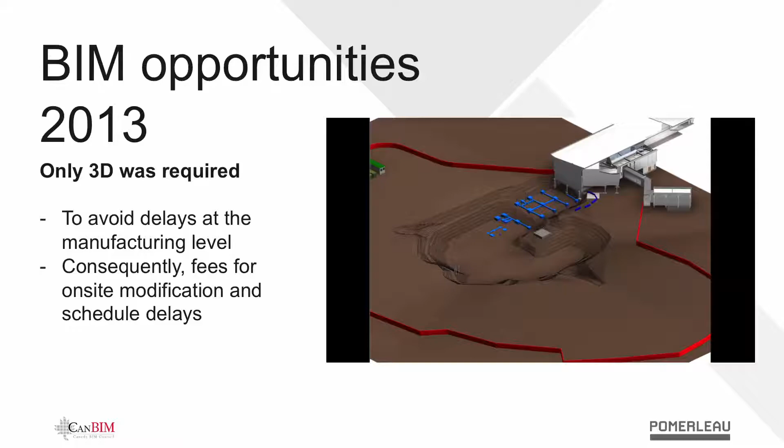But Mr. Pierre Saint-Onge and Pomerleau wanted to use the additional planning tool for planning and coordinating. The 3D model was going to be transferred to specialized contractors and the construction team so as to apply the concepts. And the idea was to do virtual construction. The obligation to design in Revit was added. Certain contractors needed some help, but they got a lot of cooperation and were able to improve in time.

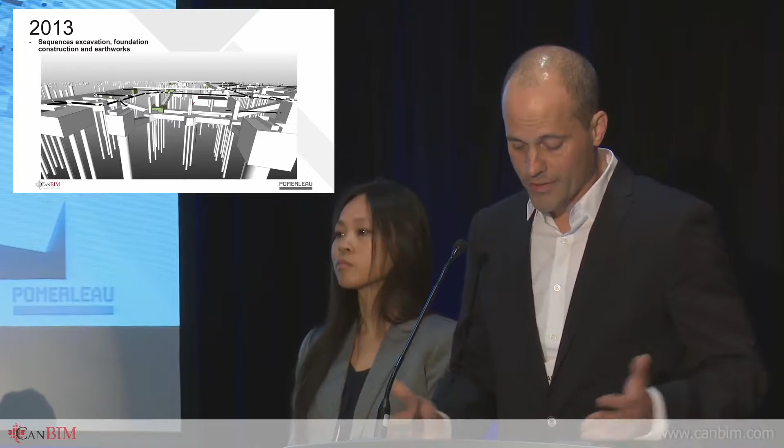Of course, if you have electromechanicals and technical rooms, we used the real dimensions of every piece of equipment. We had coordination sessions with specialized contractors with a visualization period in 3D. This made it possible to virtually look at the final product, but also to agree on how to order the work so that we could address the more complex sectors. As we use the model, we start to have a lot of ideas.

Our team didn't have much experience in BIM applications, but the 3D model turned out to be an ideal tool to resolve a lot of complex planning issues. And this was not limited to electromechanicals. It was also for other specialties less familiar with BIM.

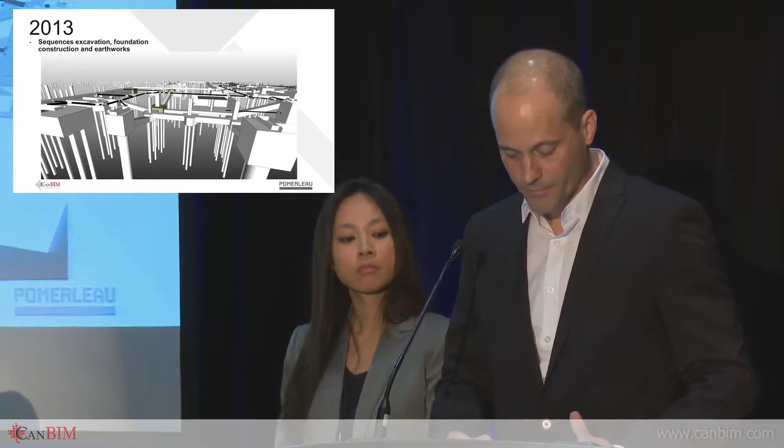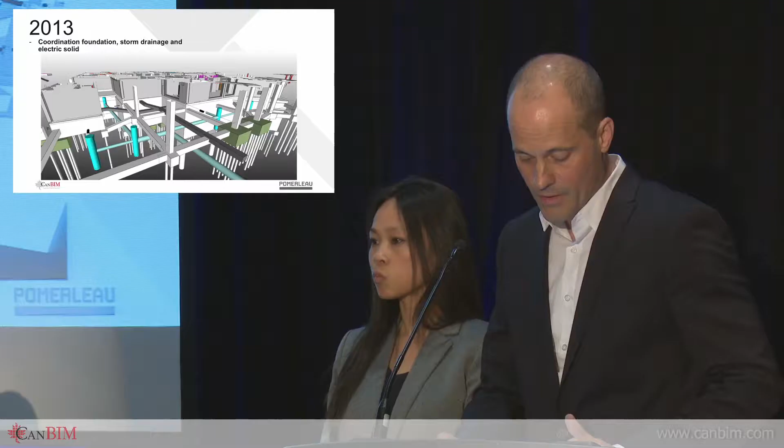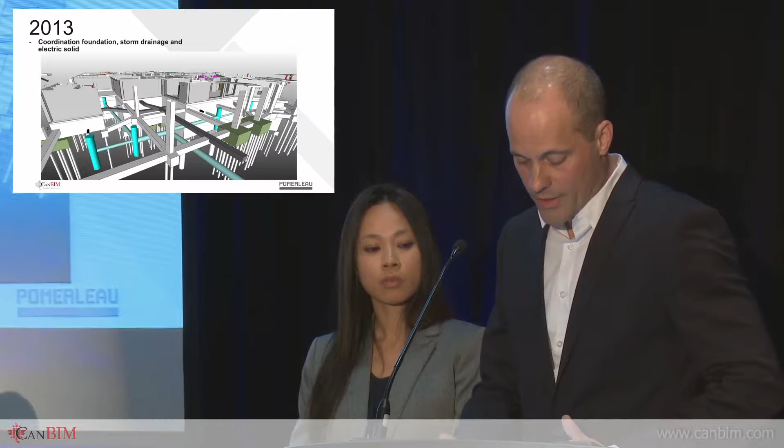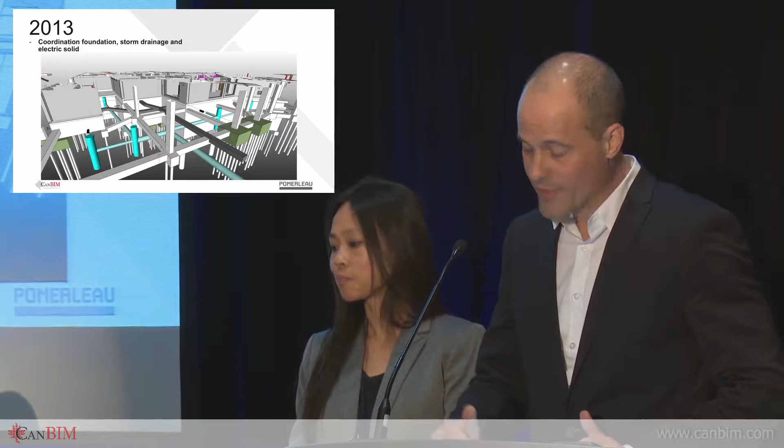The major complexity of the foundations of the building, designed over several levels, was really difficult for the various workers who had to do the formwork and the excavation, etc. But 3D visualization and 4D simulation was also able to help resolve a lot of differences of opinions and helped sequence the activity so that we didn't have downtime. Contractors were unanimous: use of the model was largely a cause of the successful completion of this critical part of the work, in a timely fashion.

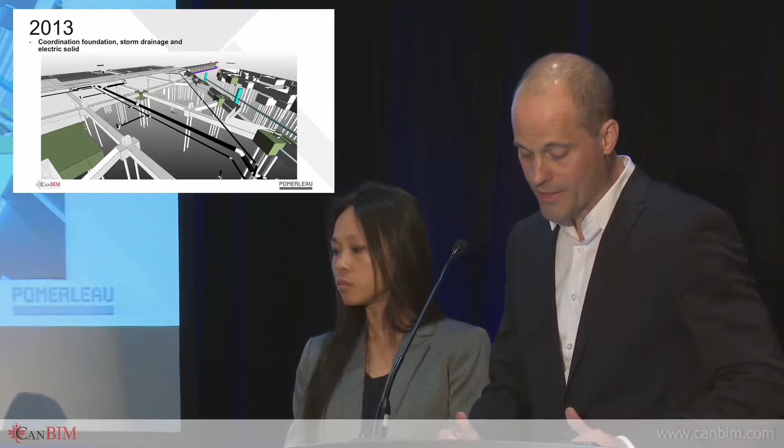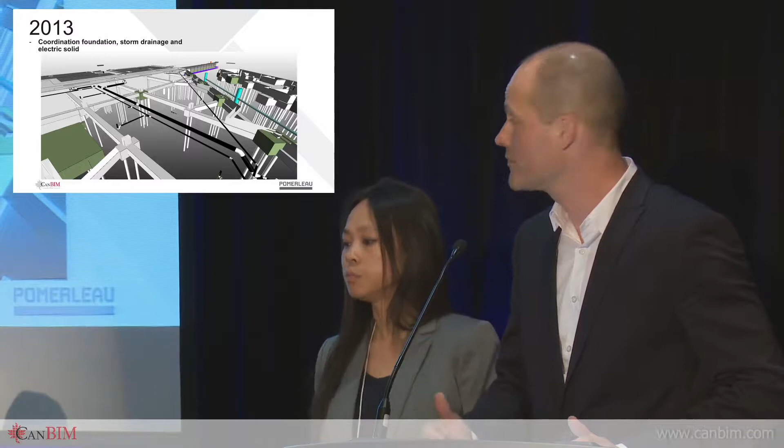But other people had equipment installed in landfill. We had electrical, drainage facilities, and there was a lot of conflict amongst the structure and the equipment. So we had to have value-added and optimization sessions. We had 3D to help engineering make the necessary changes in time. The costs of these modifications were minimal, and the scheduling was not affected. Don't forget, work had already been started and was moving ahead very quickly when we discovered these problems.

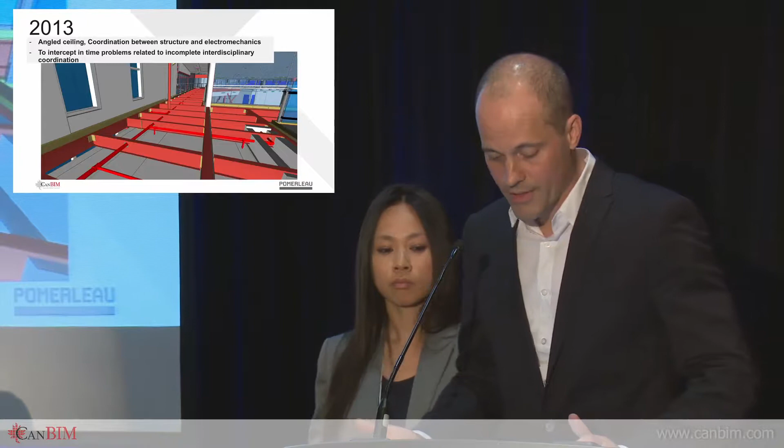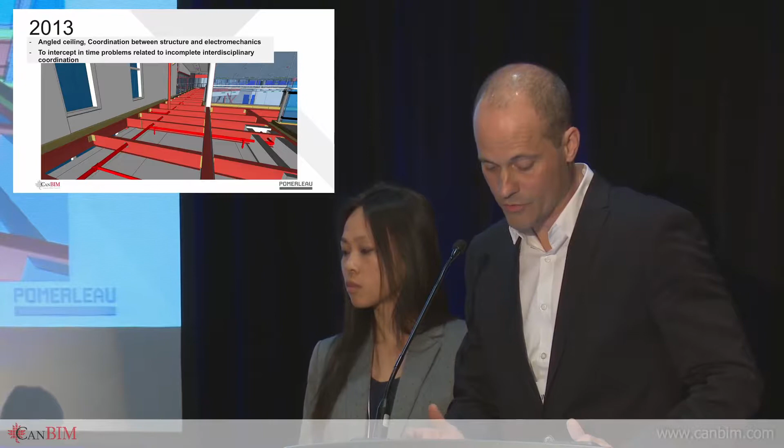Here you see an idea of the various conflicts that there could have been. We have all kinds of problems with the drainage and where the electrical equipment is going to go, etc. Then we had a lot of fire protection components that had to be integrated into the steel structure to offset the lack of space. This was done with the cooperation of specialized contractors and consultants. Coordinating from the model made it possible to confirm what was needed to be done and where, but we also avoided having a lot of ductwork go through the structures, thus avoiding a lot of problems.

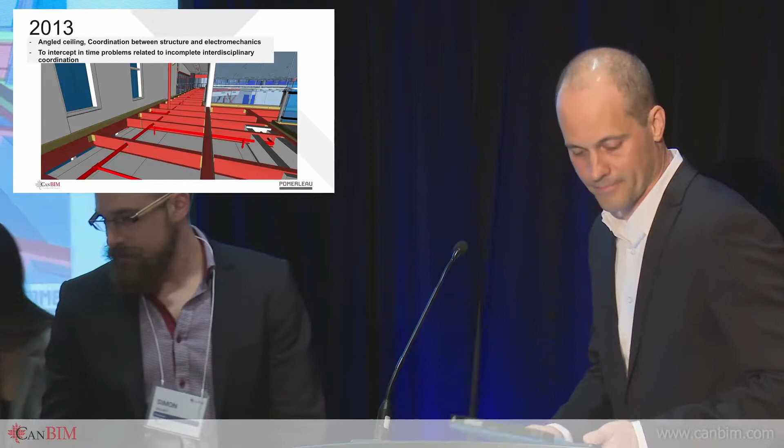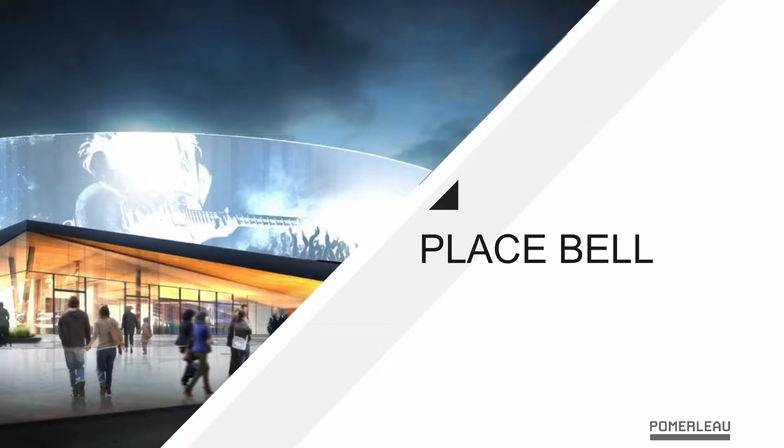I'd like to tell you about the Place Bell project. I worked with Sylvain on the extension of the International Jetty project, but as he mentioned to you, we started in the process with BIM when design was almost complete. So we started fairly late in the process, and we decided from that experience that we would change that with future projects. So in 2014, we decided to integrate BIM right from the start of the project.

So as soon as we started having the calls for tender, in the preliminary phases, we would get client documents, PFTs, information. We prepared the whole project using BIM right from the beginning, and that's a trend that's continued since then. We did win that project, and we continue to use BIM throughout the project. So I'd like to give you a few illustrations where we were able to be innovative with the Place Bell project.

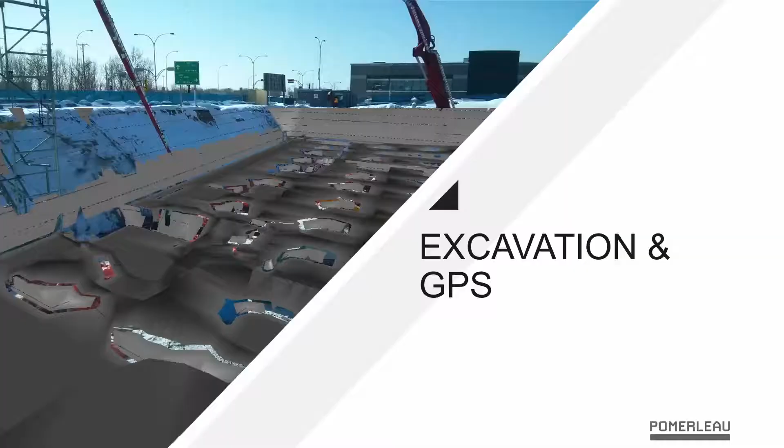So let's start with excavation. Right from the beginning of the project, in other words 2014, this was a design-build project. So we were starting design, but at the same time we were doing excavation. There was a large and changing quantity of information about the foundations, so we decided to use BIM to do a daily tracking. Really, this was daily to see what was happening in terms of foundations. So we were able to catch 100% of the changes, and there were changes every single day.

So here you see excavation and GPS. Why GPS? Well, because as you can see, we created a 3D model of the excavation, and then we transferred it into computers which were used by the excavators, so they could see exactly what they were digging in. They could see where the excavation limits were. We really optimized the process, even at the excavation level. This is the work that was done, and in addition we could optimize the location of the building on the land and all of the methods used in the future for excavation. So we saved a lot of money, and we were also able to respect our schedule.

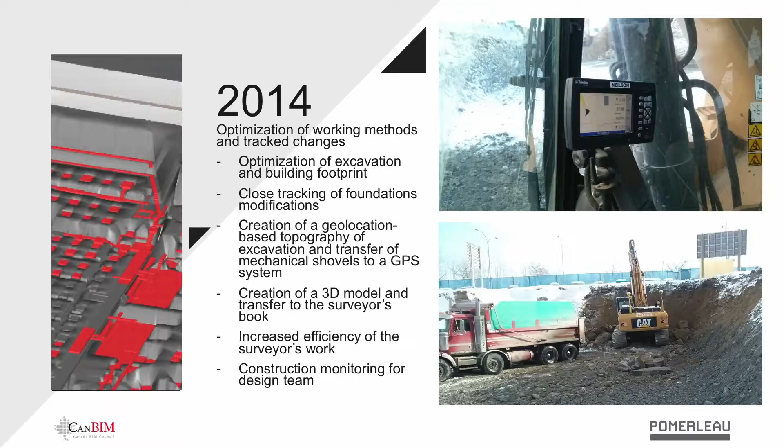Here you see some images of the excavation. On the upper right, you see what the people had in their excavators. They had GPSs, and you can see their computers. On the left, you see the actual excavation model, which is totally virtual, and it shows the foundations.

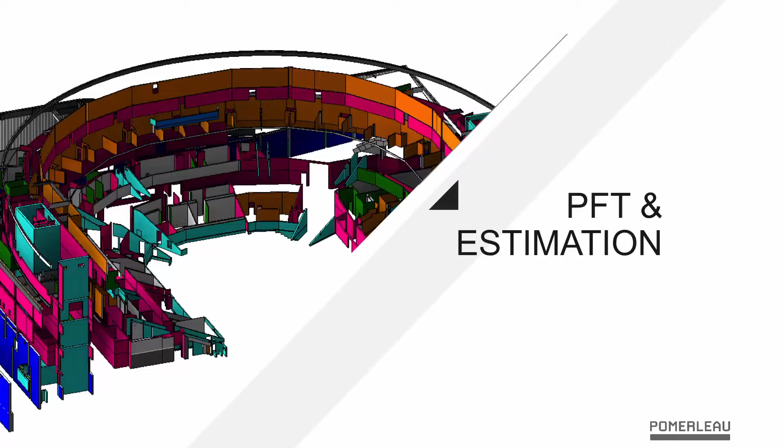PFT and estimates. As I said, right from the beginning we integrated BIM right from the very beginning of the call for tenders. So we wanted to manage our client's technical and functional program. So we knew what square footage we were looking at, what parts we were looking for. We integrated it all into the BIM model and we managed it very, very tightly. Every week we revised it, and we could see the colors, so we could really track in a simple but highly efficient manner. We were able to see everything that was changing and happening in the design stage.

We used it for the tendering process, but also during design. So we could do the follow-up with our professionals of parts, of square footage, and the clients got the same reports that we did, and we could exchange information. We could talk about whether this respected their requirements or where we needed to make corrections. So here you see a few examples.

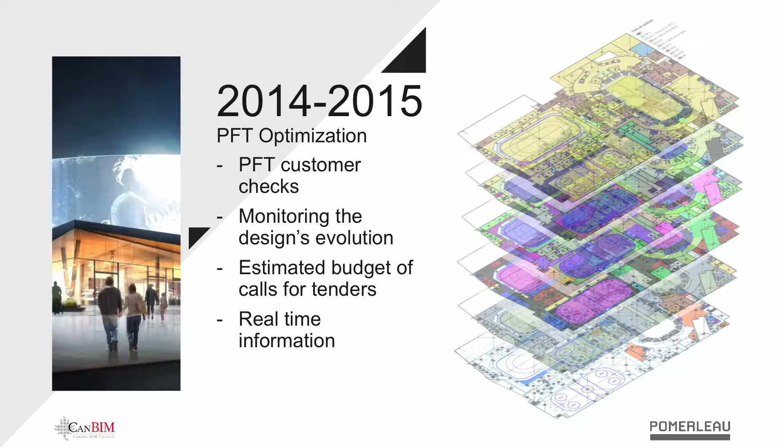The information is different, so there are 2D plans, but with information that was implemented in a 3D model. You can track this every day and every week, depending on how the design is moving.

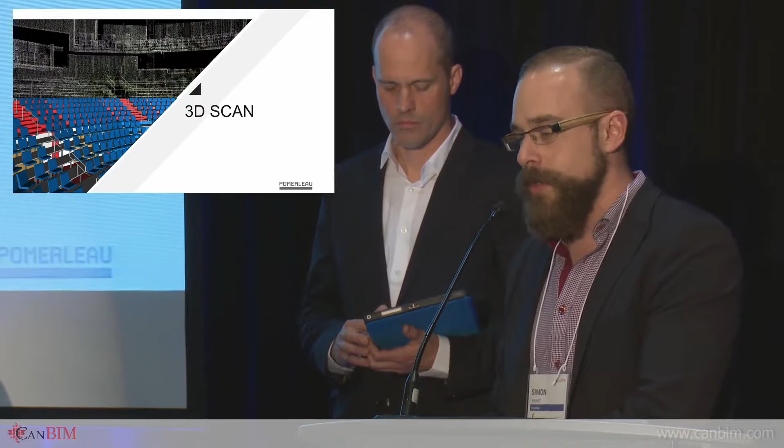There's a 3D scan. When we came in to look at the stands in the Place Bell Amphitheater, there was a Spanish company taking care of this, and a manufacturer somewhere else in the world. So we did the 3D scan to be sure that when they delivered their product, it was really going to be exactly what we needed and fit perfectly. We have a 3D scan, and there are even documents you could see showing what we had at the time. We wanted to be sure the quality of what was being built respected the manufacturing requirements.

Multidisciplinary coordination. A lot of people talked about this. Sylvain talked about it. It's something we began once we had the airport experience, and we integrated it into our process. I think Ivanka talked about it as well. It's not really an innovation anymore.

But what we did do with coordination was move it forward with our clients. I'll give you a quick example. We set out an audit process with our client, but it's virtual. We essentially covered 100% of the project over 3 different sessions, I think 3 full days. We sat down and basically audited every part of the building. They had their professionals team, we had our professionals and our contractors sometimes. We checked everything, looked at all the comments and measurements, and took note of everything. This way we were able to set up a list of items that had to be corrected.

That exercise was last year, so a year or a year and a half before delivery. We had a list of about 500 corrections we had to make. We called it the virtual building delivery, a virtual taking possession of the building. With the technical people and the marketing people, we got 100% of their comments, and they were able to check their whole building, all the requirements even above and beyond the functional and technical program our client had. We integrated them into our design and made all the necessary corrections they asked for. So multidisciplinary coordination, yes, but we try to push it even further, and we can use the tool for that.

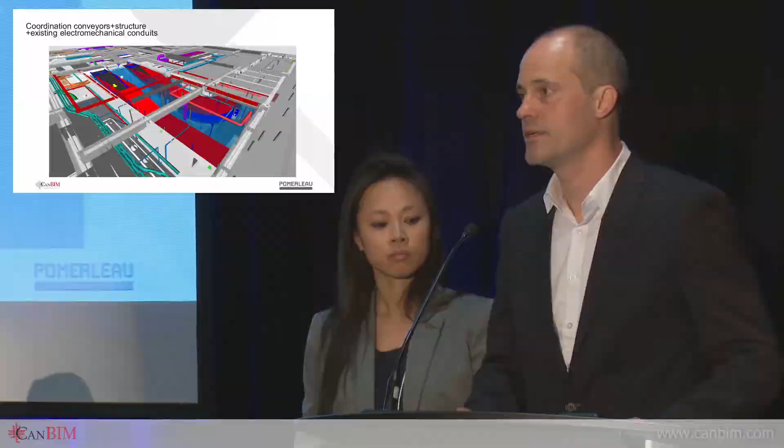Right from the beginning, the Montreal Airport said it wanted to have a 3D model, both for the design and the build of the actual project. So they encouraged us to use BIM. This was the first time, but we already had BIM expertise, which had improved a lot over 2 years. The number of specialized contractors using BIM increased considerably over those 2 years, so when we had a call for tenders, many more responded because it was a requirement of our tender.

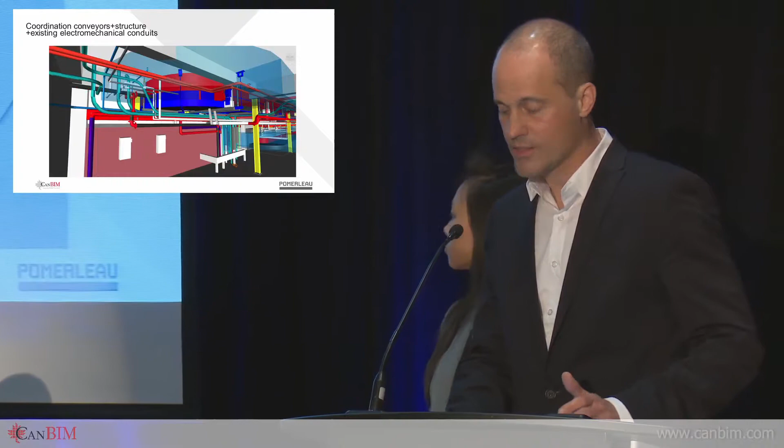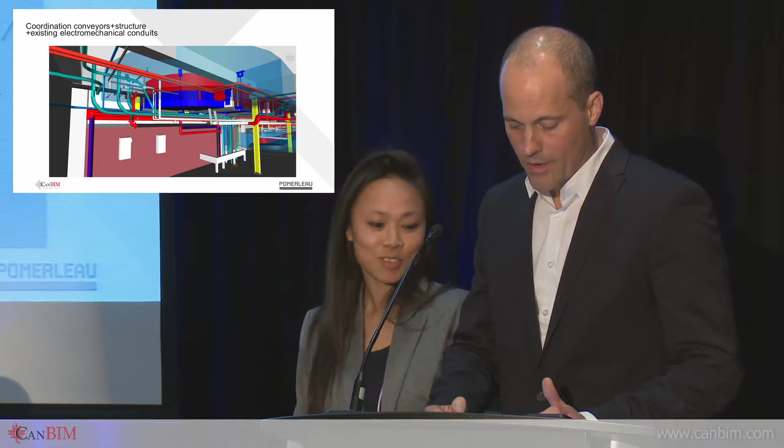Adding the baggage conveyors through old and complex structural elements and a lot of electromechanical facilities was, as you see modeled here, very complex. I'll explain: the idea was to deal with an existing structure, because there were 2 conveyors going down from level 2 to level 1, then turning around in an operational sector that is very narrow with a lot of existing ducts. So there was existing complexity, plus new highly specialized equipment, and it was an old structure that was pretty complicated as well.

The conveyors had to be ordered in advance because delivery time was long. They came from Europe.

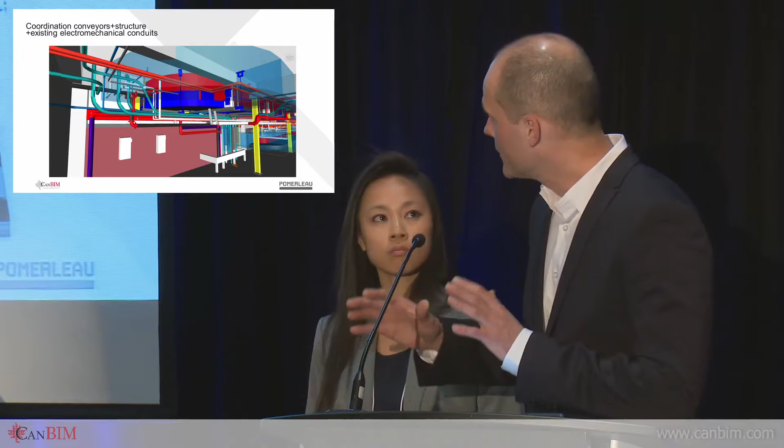So we modeled the clearances required around the conveyor belts for baggage, maintenance, and operations. And we created volumes. You could see in light blue, these are clearance areas for the conveyors for baggage, operations, and maintenance.

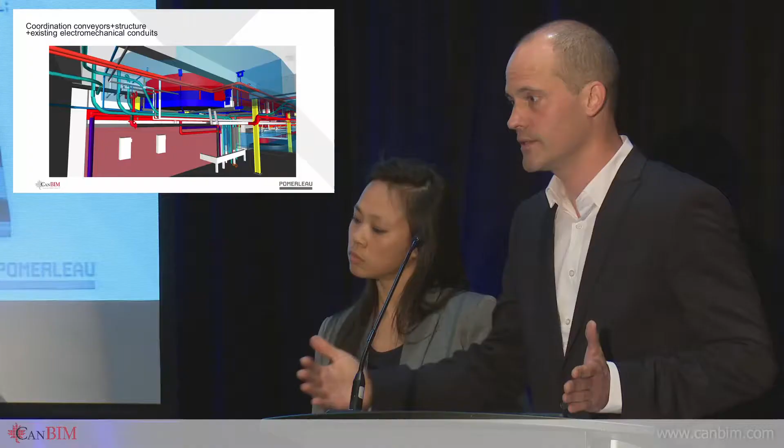We did this so that we could check to see whether there was going to be any potential interference after construction, because if there was, it would be problematic. We had to be sure that everyone knew how to build what needed to be built. And some of the new conveyors had to go above a public passage that had to remain operational. It was done as visualized - there was nothing unexpected and nothing that needed to be changed.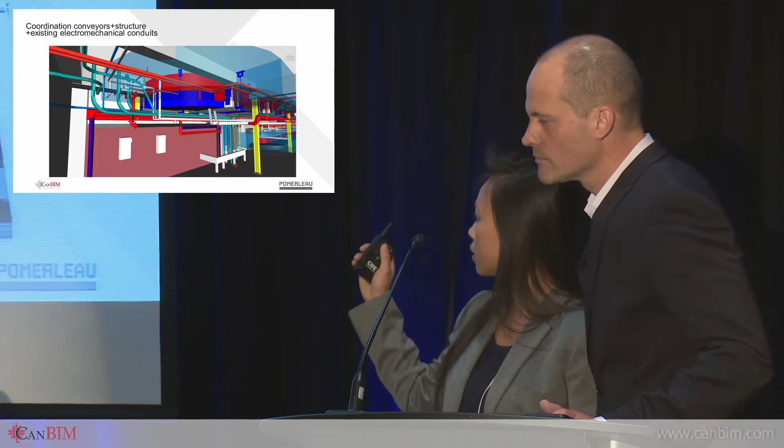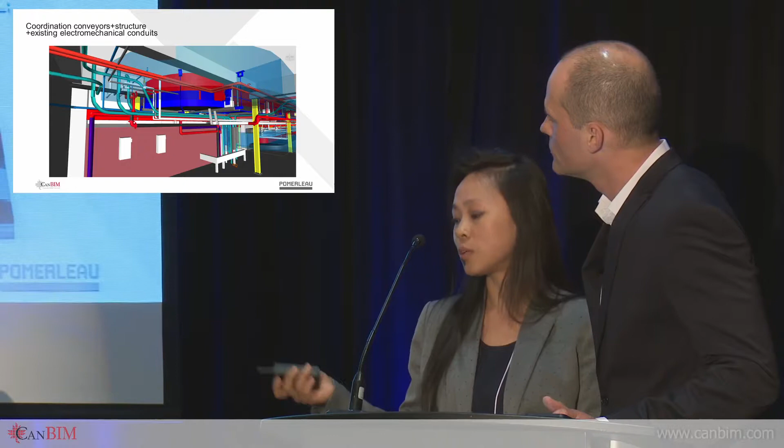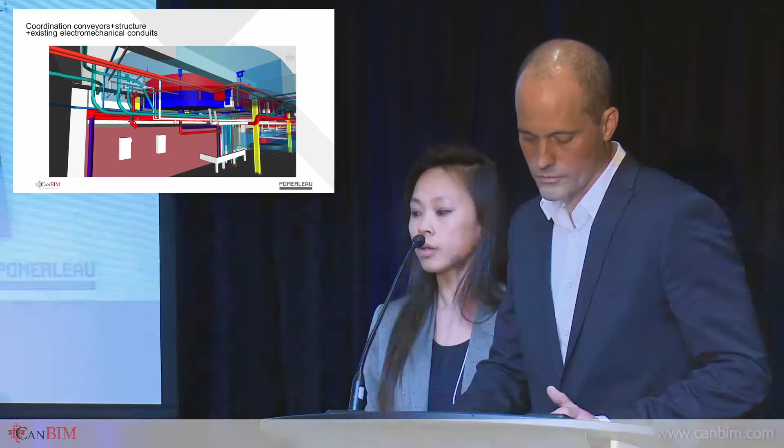Here you see on the right the public sector where people are picking up their luggage. And on the left, it's where the luggage carts are. And then you have the carousels. Closer to the ceiling, you see the conveyor belts, the new ones.

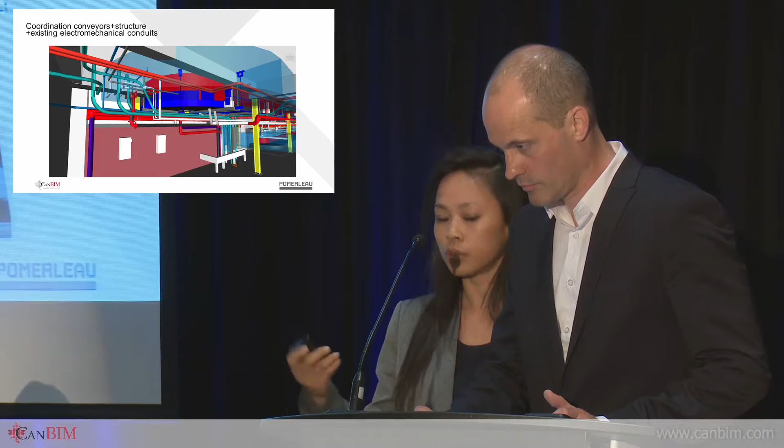In the project, there were several related projects, and they were all happening around the Zone 1 area, the major baggage conveyor room. They were very close to our project, so we had to ensure coordination with them.

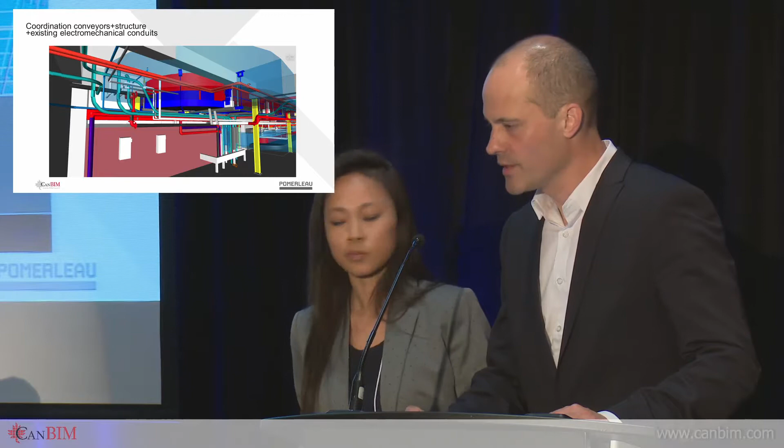So all of this work had to be done while the airport was running, and they had to be as invisible as possible. A lot of the work had to be done on platforms that were erected above where passengers were actually walking.

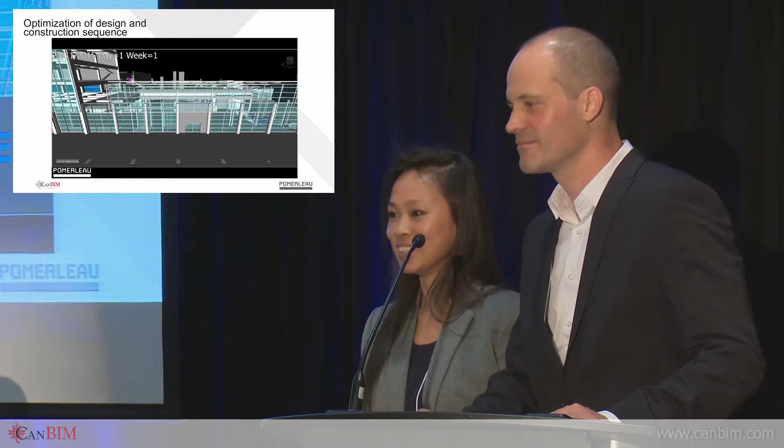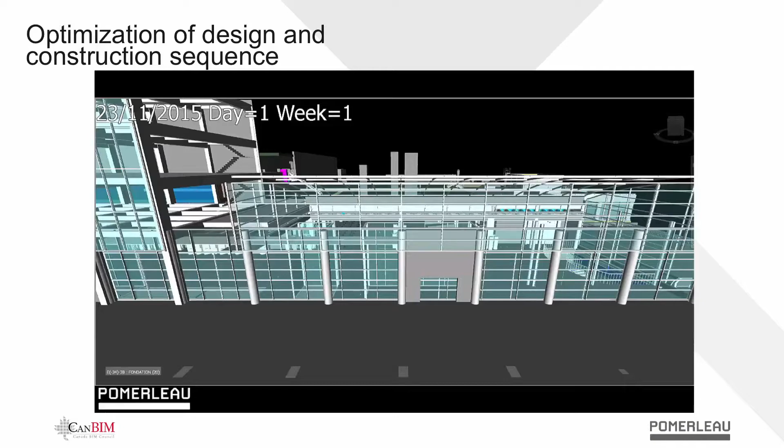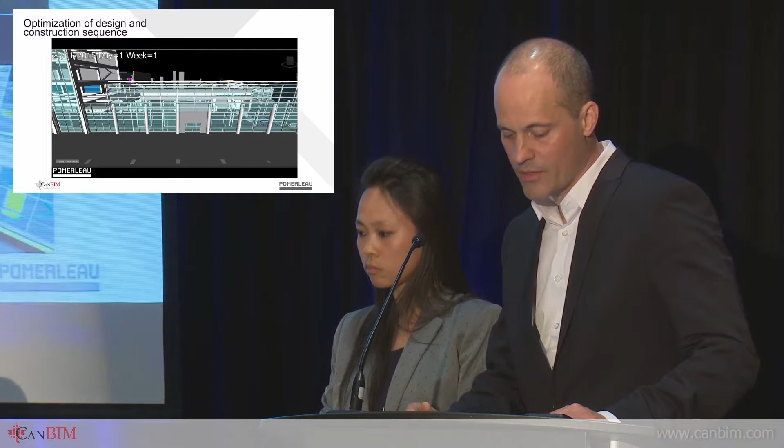So there was a lot of work being done on platforms above the travelers, and there were changes throughout the construction. It's very complex. All of this was modeled and presented to Aéroports de Montréal for approval before implementation.

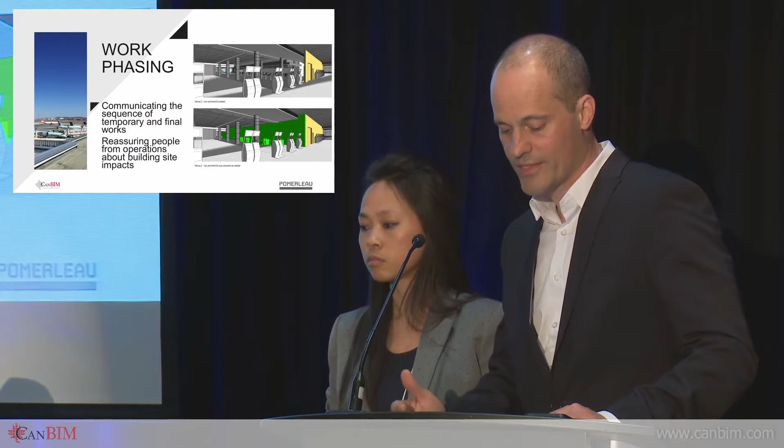They were integrated into the 4D model - what you can see here in the animation. Having these virtual phases made it possible to understand when there were key planning sessions. Here you see the phasing at the various levels of the project zone.

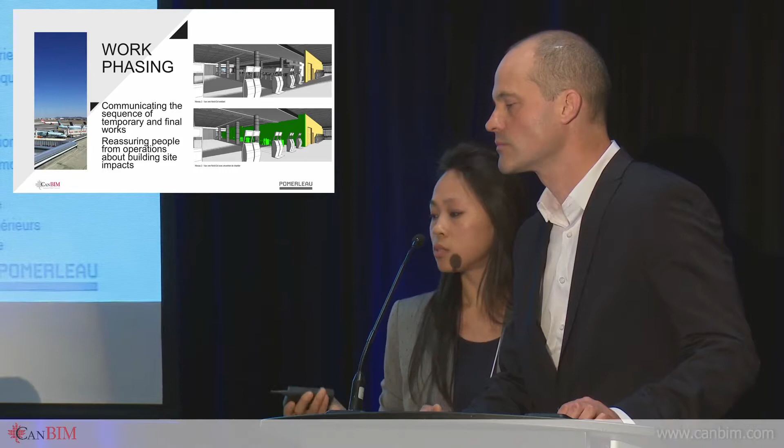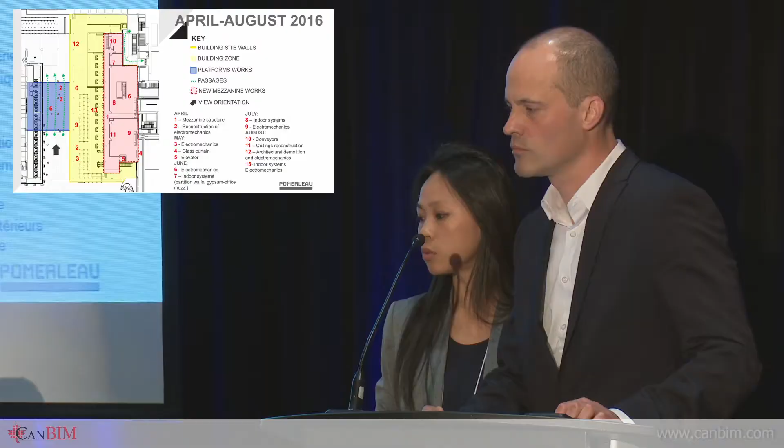This is to give you an idea of the kind of work that needed to be done in time, and not only tell the client about this, but also to be able to explain this to the airlines. So these are the platforms.

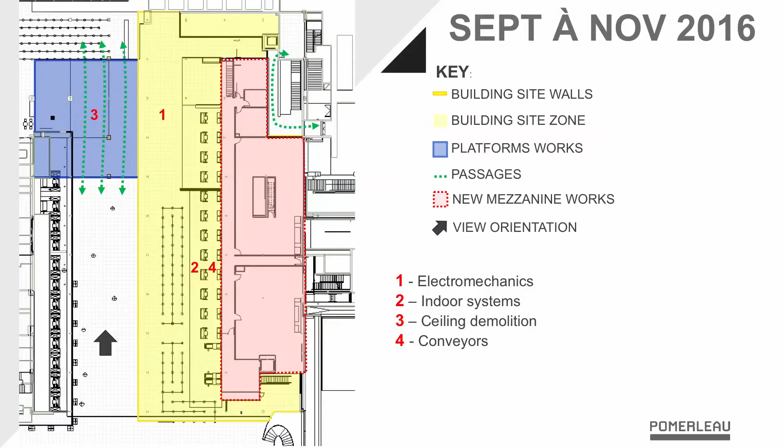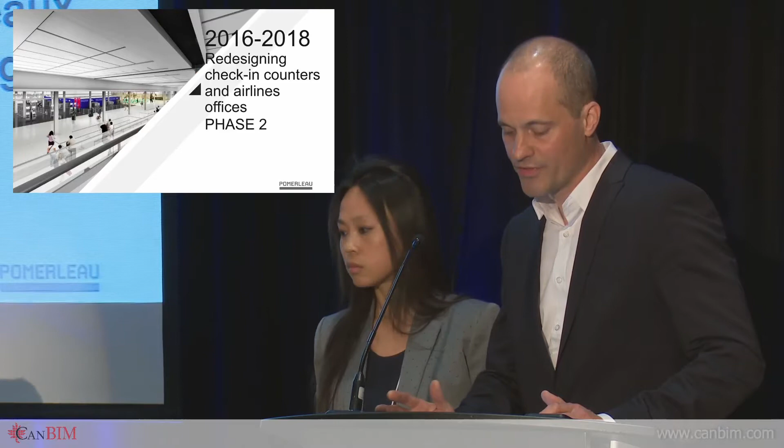So now it's 2016, and for phase 2, the design had started in 2016. So for phase 2, ADM required that there be a BIM coordinator responsible for following up the various design models, to be involved even earlier in the project - in other words, right from the beginning of the design. Aéroports de Montréal is much more interested in BIM than they used to be.

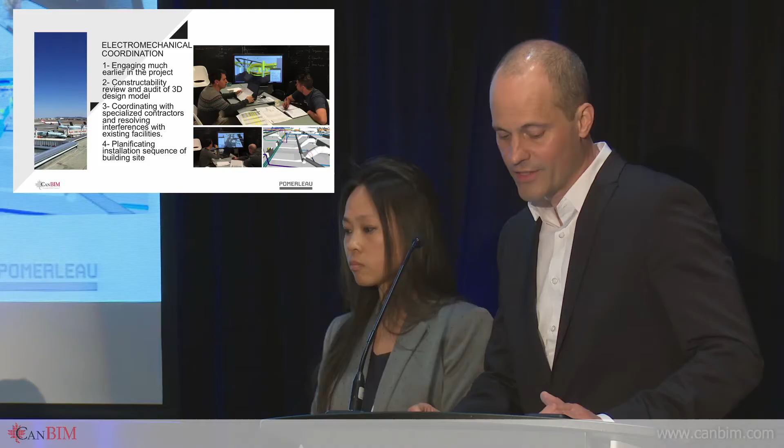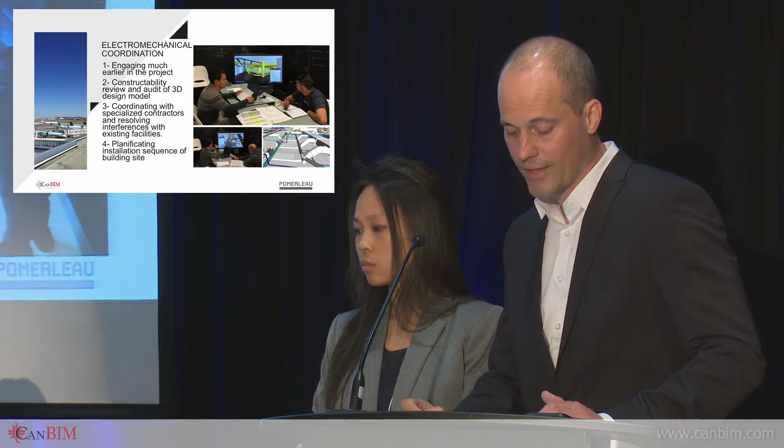For phase 2, the work areas are even closer to the crux of airport operation activities, and when they come close to the peak periods of the year, it's even more crucial. There's all kinds of temporary possibilities presented to the airport using virtual reality so that the construction can take place and respect operations, and vice versa.

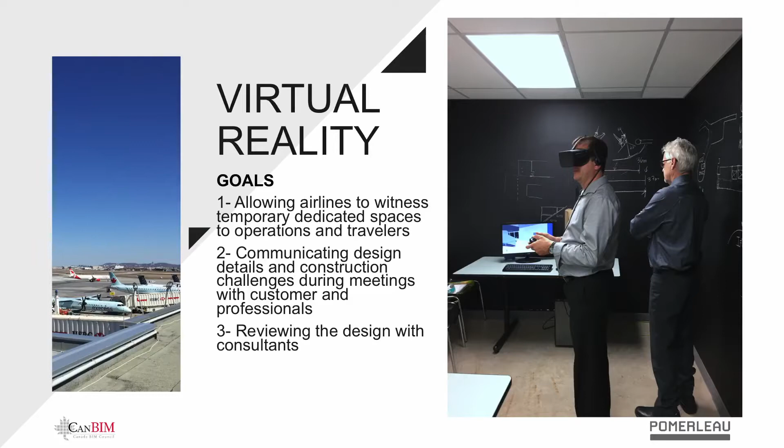The main users, seeing that their workspace was going to be changed considerably by the work, expressed a lot of concerns in terms of the available space for passenger check-in. The people in charge did a virtual visit, commonly called a walkthrough, and looked at the space that would be available during the construction period.

And if you're interested, as Ivanka said, at our booth, you can actually take a look and do a walkthrough of the project, because it's not yet built. It's at the very beginning of the construction phase right now.

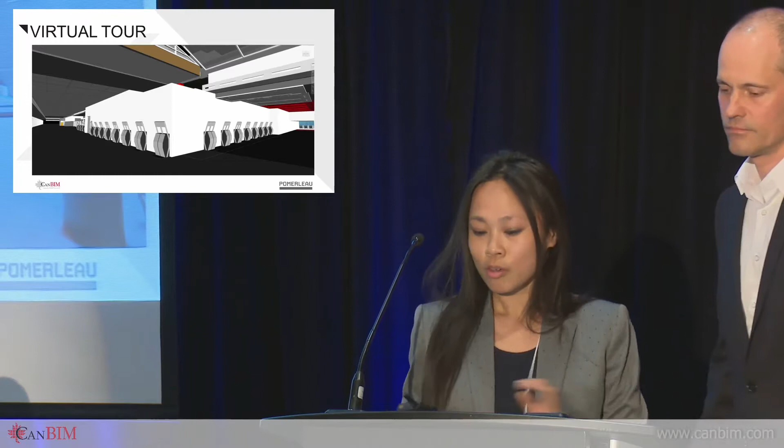As Ivanka said earlier, BIM is a vector for innovation. Our long-term vision is not just to use BIM, but to really push it to another level, push all available tools to another level, so as to offer a service which closes the loop with BIM - not just in feasibility and design phase and build phase, but through the entire life cycle of building operations and even up to decommissioning.

And we're always on the lookout for new technology and new ways of doing things so that we can manage better and work better. For phase 2 of the airport extension, we're going to be introducing lean construction.

We're going to be integrating buy-in from contractors and subcontractors, and we're going to continue to use 4D and virtual reality. So I just want to go back to this slide. Not only is it an excellent communications tool for the project that's going to be built, but also to illustrate all the temporary facilities that have to be built over the course of the project's life. It's also useful to convey the details of the design and challenges of the design during meetings, and to be able to review and revise construction with consultants so that we can have a final walkthrough with subcontractors when there's a coordinating zone and it's finished.

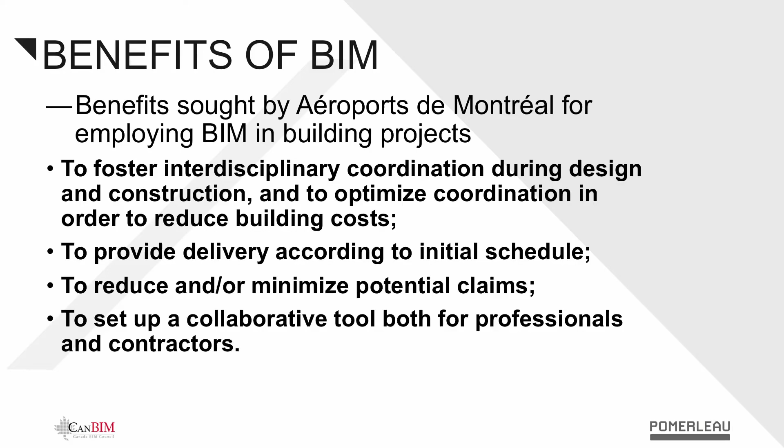And the other very important consideration was budget-wise. It came in at 95% of the authorized budget, so we were well within our budget, which we were very happy about. Which leads me to talk to you about changes in using BIM. From 2012, it was simply an idea. Okay, let's explore what it can do.

Today, as Sylvain said, we've had 2 other projects, phases 1 and 2, of redoing the check-in areas. Now BIM has become absolutely essential. Any project that has any complexity at all has to be designed and built with BIM. I think that's essentially what I wanted to say. So we're very pleased.